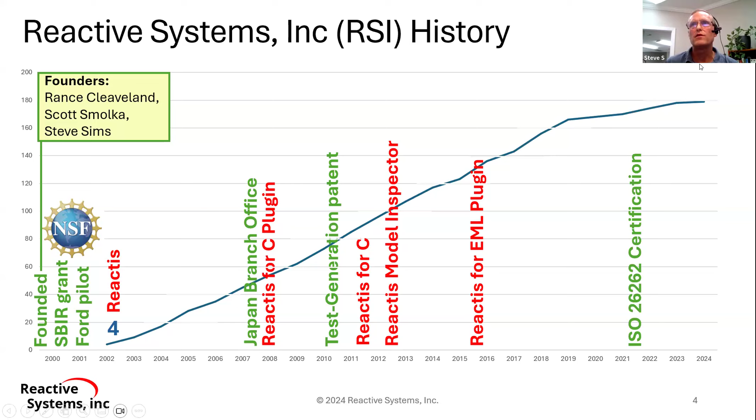We launched 3 more products over the next several years. And then in 2021, we received ISO 26262 certification for our products. That is a standard that mandates the development process for safety critical automotive software.

So we've incorporated the company. We had a lot of ideas about how formal verification could help in the development of embedded software. The first thing we wanted to do was try to find a partner that we could do a project with. So we started attending some more industry-leaning conferences. We met some engineers from Ford and discussed our ideas about the company with them, and they agreed to do a pilot project with us where we would together analyze a piece of their software using formal verification.

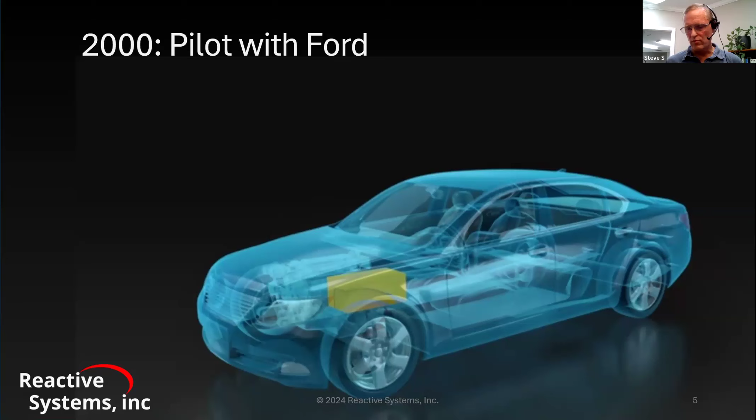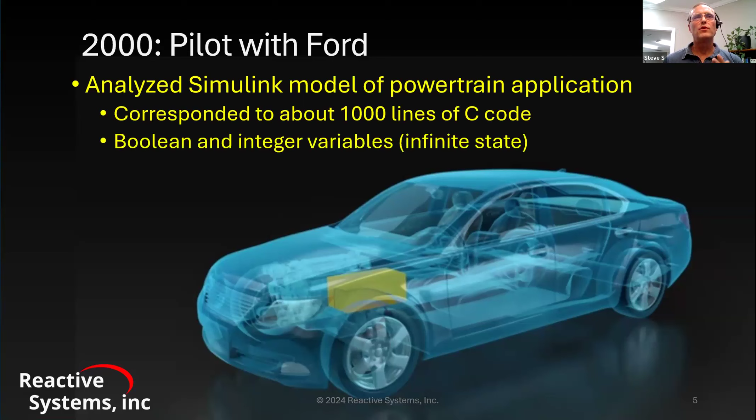About that time, Ford and other automotive companies had started using a modeling language called Simulink, offered by the MathWorks, as a way of modeling their software. So Ford gave us one of their models of a powertrain application to look at. It wasn't a huge model, but it wasn't a toy model either, corresponding to about 1,000 lines of C code. It had both Boolean and integer variables, so it was infinite state.

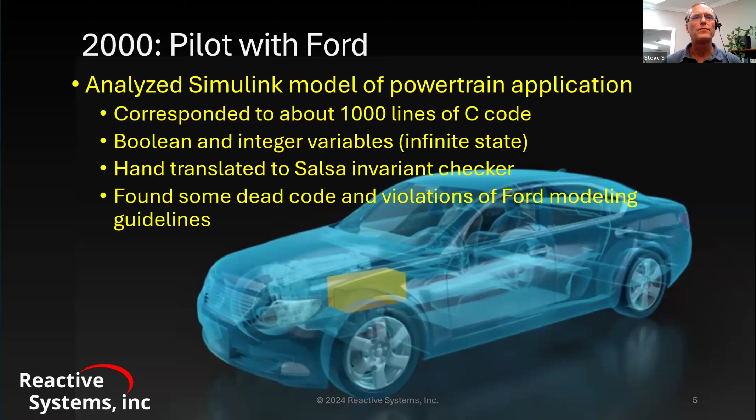What we did was hand translate that Simulink model into the input of an invariant checker to check some properties. We were able to uncover some dead code in that model and also some violations of Ford's modeling guidelines. That caught Ford's attention and gave us hope that we were on the right track. It also had a couple of big impacts on the direction we would take: first, it pushed us towards Simulink as the modeling notation we would support, and second, it opened us up to the automotive industry as a potential market for our products.

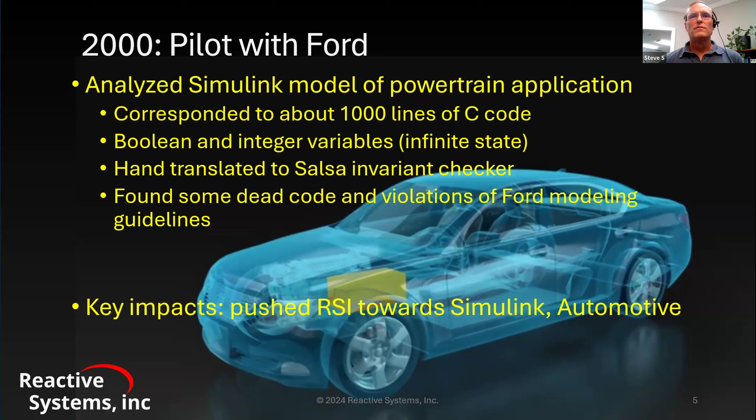At this time, there was already a fair bit of software in cars, but over the past 25 years, that's just exploded. So today, cars have massive amounts of software, and all that software needs to be tested.

It's just computing the disjunction of its inputs. In addition to logical operators, you have relational operators, mathematical operators, and more complicated functionalities such as an integrator block. You can decompose your model into smaller parts by creating subsystems. Each subsystem will have some inputs that it reads and some outputs that it updates.

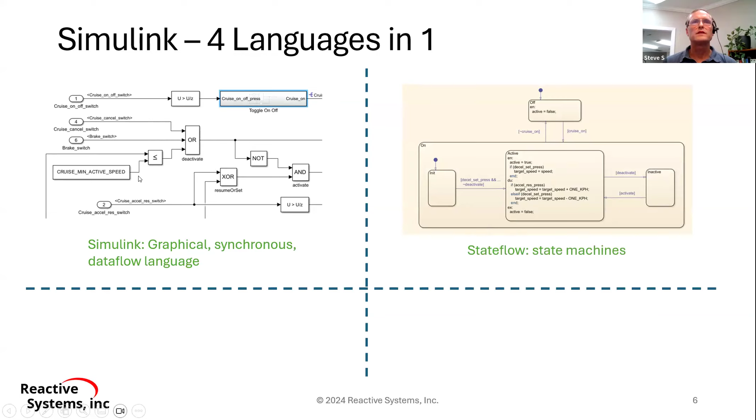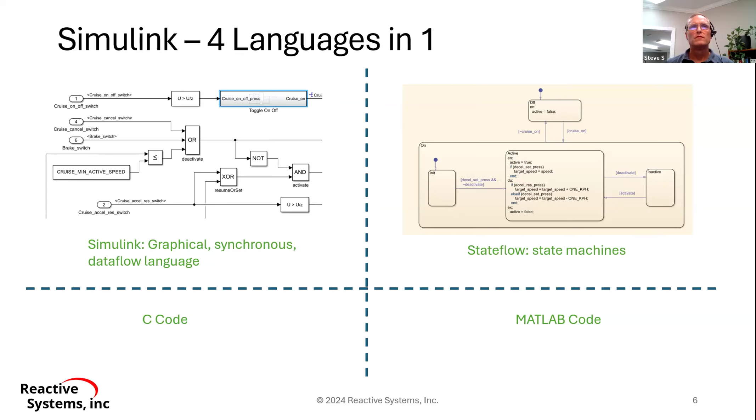Stateflow is a state machine notation. And you can basically create a state machine that you insert into a Simulink diagram, and that specifies the behavior for that subsystem of the model. You can insert a chunk of C code anywhere in your model. You can also insert a chunk of MATLAB code, which is the MathWorks matrix manipulation language. So it's a very complicated language, but it was one that was starting to be adopted at the time we

launched the company. So our first big decision point was, after this project with Ford, we saw that Ford and many other companies at the time were starting to use Simulink. So should we target our tools for Simulink, or should we go with the homegrown language? As I mentioned, Rance, Scott, and me, to some extent, have done a lot of research in what good specification languages were. So we had a lot of ideas about what a good modeling language would look like. So we had to decide, do we define our own for our tools to use, or do we go with Simulink, which is the language offered by the MathWorks?

So some factors that went into that decision. It's a much easier sell if the company you're working with is already using the language. So Ford, for example, already had Simulink models. So the selling point to them was, okay, you have a Simulink model, we can perform some checks on that model. It's a much easier hurdle to surpass than, okay, first translate your software or your Simulink model into the notation of our tool, and then you can perform all these neat checks that we're able to do. So if we can perform checks on a model that the customers already had, that was a big point in the favor of Simulink.

Secondly, we were young at that point, just a less than a year old startup. So companies were hesitant to commit to using a modeling language that we came up with. They didn't know how long we'd be around. Many startups fail after just a few years. It's a big investment to develop models in the notation, so they were hesitant to make that investment on a company that was so young. So that was another point in favor of Simulink. And then at this time, Simulink was already starting to take off, even dominate in the automotive and aerospace industries. So it had a lot of momentum behind it already.

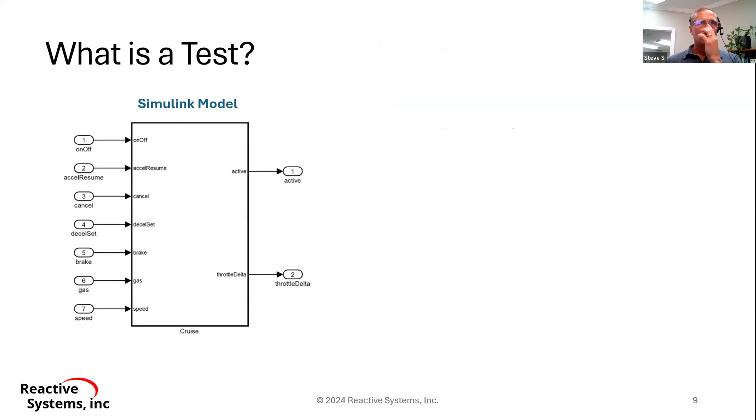The second initial functionality we offered was automatic test suite generation. So the idea here is that you have a Simulink model. Our tool will take that model, analyze it, and then automatically produce a test suite that comprehensively exercises the behavior of your model. So we want to generate test suites. So what is a test for Reactis? It's just going to be a simulation run of a model. So here we just have a small Simulink model that has some inputs that it reads and some outputs that it computes.

So a test is just going to be an execution run of the model where we feed in some inputs, capture those inputs in our test. The model computes the outputs. We capture those outputs in our test. Let me take another step, feed in some more inputs, compute the outputs, capture those. Feed in some more inputs, capture the outputs. So it's just a simulation run of the model where we're capturing the inputs and outputs.

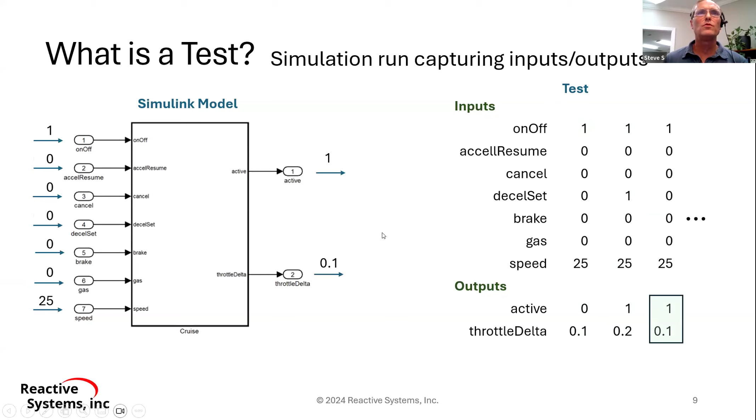So Reactis Tester, to recap, it's going to take a Simulink model as input, automatically generate a test suite. That test suite is going to consist of a set of tests. Each test is a simulation run of the model. That is a sequence of steps where at each step, we capture the inputs that we fed into the model and the outputs that the model computed.

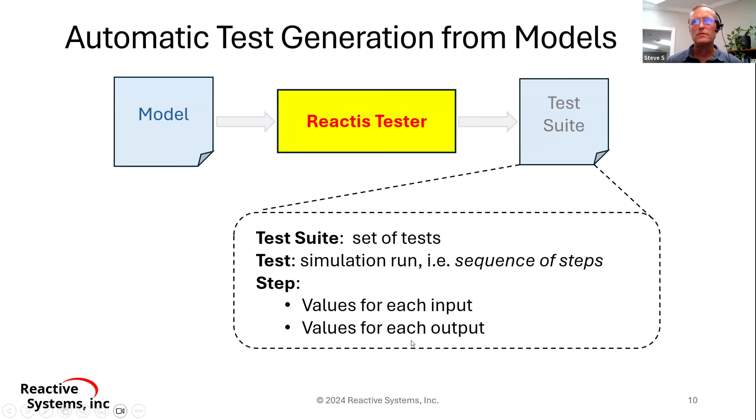Okay, so what are our goals for these tests, and what can they be used for? The most important goal is that we want to maximize coverage. We want these tests to exercise as much of the model's behavior as we can. We want them to be thorough, so we maximize the chances that we uncover errors when they execute. But at the same time, we don't want these tests to take forever to run. So we want to avoid redundant test steps whenever we can, so that these tests can execute quickly.

So while we want the test to be comprehensive, we also want to have as few overall test steps in the test suite as we can. Then finally, as I said, we want to store both the inputs and outputs to make it more convenient to do different types of things with these tests. For example, just by generating these tests, we can uncover runtime errors that I mentioned previously, divide by zeros, bad array indexes, overflows. So just by doing the very comprehensive simulation that we're doing to generate these tests, we have a good chance of finding runtime errors in a model.

These can also be used for regression testing. So let's say you make some changes to your model, and you want to check and see if those changes impact the externally visible behavior of your model at all. What you can do is generate a test suite from the original version of the model, run those tests on the new version of the model, then any differences in the outputs calculated by the new version of the model that are different from the original version of the model will be flagged.

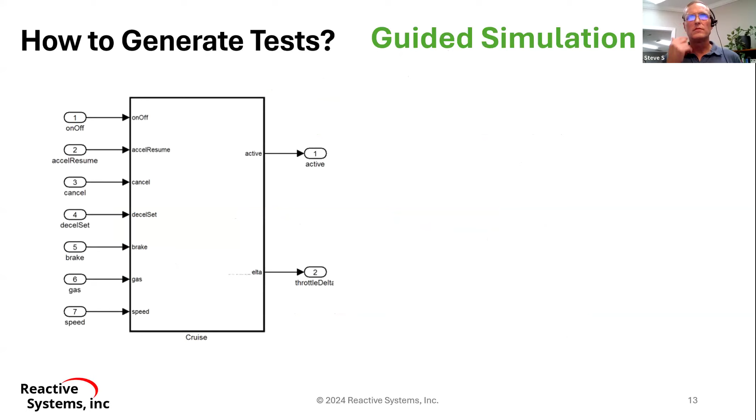So how do we generate these tests? We use a technique that we call guided simulation. Scott mentioned this in his introduction as well. What is guided simulation? So to generate tests for this model, we're first going to identify all the different coverage targets in the model. So we're going to look in our model, see what the logical operator blocks are. For every logical operator block, there's going to be some decision targets, condition targets, and MC/DC targets. So we identify the coverage targets. We then simulate the model.

As we simulate the model, we capture the inputs and outputs, as I had showed earlier. We track the coverage. We look at which coverage target has been exercised and which has not. And then finally, the guided part of guided simulation is that for every simulation step we take, we want to look at which coverage targets have been exercised and which have not. We want to pick a target that hasn't yet been exercised and try to pick inputs that are going to cause that target to be exercised.

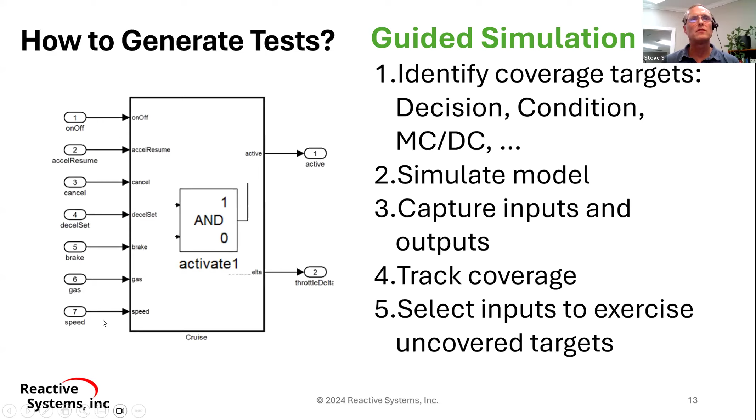So how do we pick inputs? That's the hardest part of guided simulation. So we have two main approaches that we use for picking the inputs. The first is using SMT solvers. So we identify an uncovered coverage target. We then formulate an SMT constraint such that if we can solve that constraint, the result will give us the inputs that are going to cause that target to be exercised.

We started out with some homegrown solvers, and then in 2016 switched over to using the Z3 solvers offered by Microsoft. If we're able to do this, this is great. We're gold. We can generate a good test suite that covers our model if we're able to do this.

But remember how complicated Simulink is. It has the data flow language. It has the state machine language. It has C code in there. It has MATLAB code in there. It's a very complicated modeling language. So we're not always able to formulate these SMT constraints in order to get our inputs.

So in the cases where we're not, we have to fall back on option 2, which is to generate random input values. In selecting these random input values, we do take user constraints into account. So for example, a user can specify that a particular input should be within a given range. Then we also have a collection of heuristics that we employ to improve the likelihood that we cover more targets with our random searches.

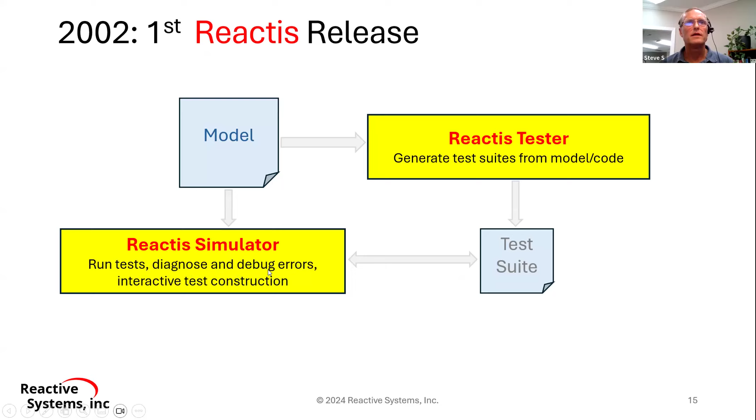So our first Reactis release was in 2002. It included Tester, as we've been talking about, and Reactis Simulator, which is a model execution environment. If Tester finds an error, it's very helpful to be able to execute that error to understand exactly what's going on as that error occurs and diagnose and debug the problem. So Simulator is really a full debug environment for Simulink models.

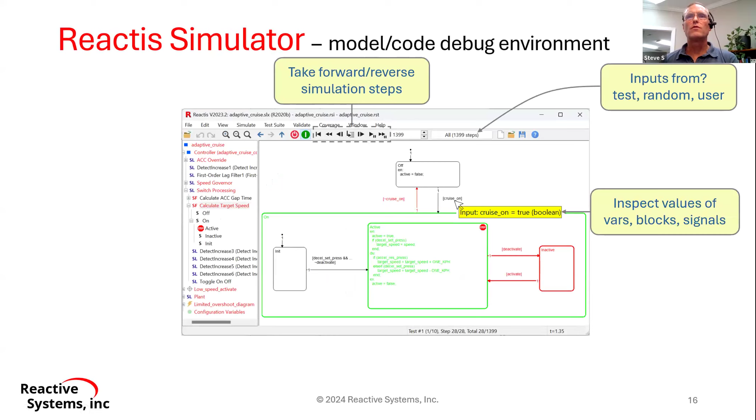You can execute tests that have been generated by Reactis Tester. You can control your stepping with these controls. And one thing that's nice is that you can go backwards in a simulation run. That can help in diagnosing what's going on before the actual error occurred. You can hover over any variable to see its current value. Unexercised parts of your model are highlighted in red. You can set breakpoints. You can open a scope to see the values a variable has taken on since the start of a test. So it's really a full debug environment for Simulink models.

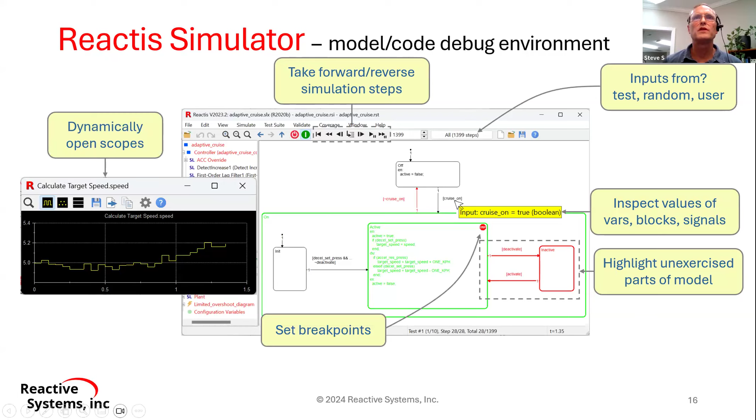In 2003, the next version of Reactis, we launched Reactis Validator. What this allows you to do is check if a model satisfies its requirements. It allows you to formulate requirements that your model should meet. Reactis will then do a search to see if it can find any violations of those requirements. If it finds a violation, it's going to give you back a test. This test you can execute to understand the exact sequence of events that leads up to the problem.

So the requirements are formulated by giving assertions and user-defined targets. An assertion is just an expression that should always be true. If it ever becomes false, that means the requirement has been violated. A user-defined target allows you to specify a scenario that you want to make sure you're testing in order to properly stress the requirements you're checking. Reactis supports two notations for giving assertions and user-defined targets. You can either give them as C-like expressions or as Simulink/Stateflow observer diagrams.

How do we check it, or how do we look for violations? We use the guided simulation technique that we described for generating tests. So, of course, this means that we can find bugs, but we can't necessarily prove their absence. So we might find cases where a requirement that you've specified is violated, but we can't say for sure in most cases that the requirement can never be violated.

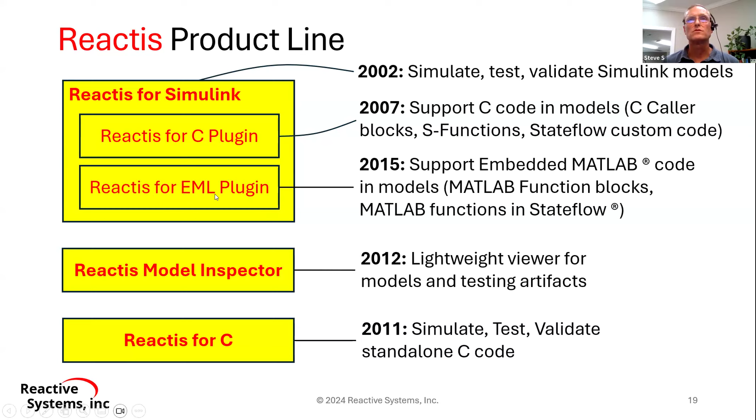And the Reactis for EML plugin does the same thing for embedded MATLAB code that the C plugin does for C code. So if somebody sticks embedded MATLAB code in their model, this allows Reactis to identify the coverage targets within that embedded MATLAB code and generate tests to exercise those targets. About out of time, so I think I'm just going to skip this slide.

So to recap, in 1999, Rance, Scott, and I saw an opportunity to possibly commercialize formal verification, bring it to the development of embedded software in a commercial setting. We had a little bit of a pivot from actual formal verification to more of a bug finding approach where we can't prove the correctness of the software we're working with, but we can find bugs in it.

We can find runtime errors. We can help with checking C code against the model. We can help with regression testing. We can help checking if a model meets its requirements. Reactis is currently used by many companies around the world, mostly in the automotive industry, some in aerospace. So we've been very happy with the success of the company. I think the company is one of Rance's legacies. It's something I know that Scott and I are proud of, and I know Rance is proud of.

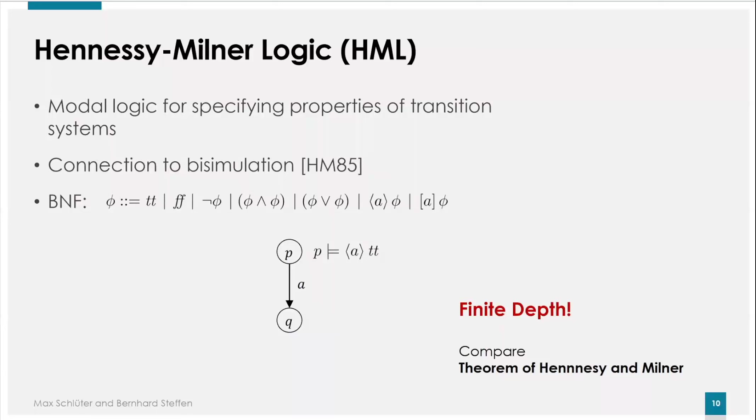This much stronger property cannot be true for Hennessy-Milner logic, because Hennessy-Milner logic can only look finitely deep into the computation tree, and we are talking here about regular systems with potentially infinite behaviors. Let me now come to the main result of this talk. We have just understood that Hennessy-Milner logic is not expressive enough to specify the characteristic formula of a process, just because it cannot specify depth.

But, and this is what I want to show today, it is sufficient to specify an invariant, a property which always holds, which is sufficient to characterize a process up to bisimulation. That this is possible relies on the following observation: it is possible to decompose the specification into two parts, a characterization of bisimulation equivalence classes and the transition relation.

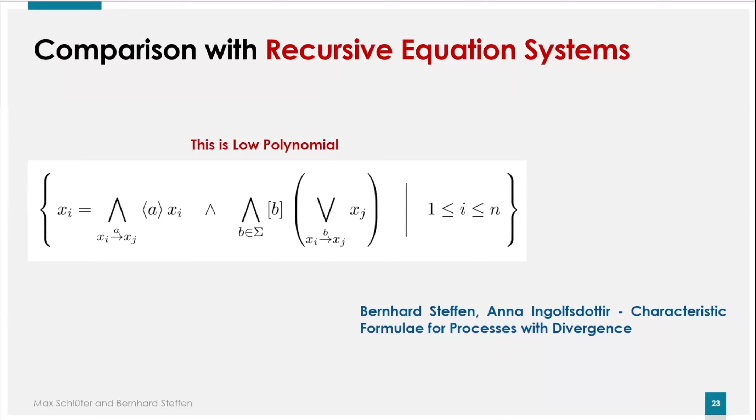This result very much shows the power of recursion and recursive definitions, and that algorithmically this recursive power is not even that problematic, because you can very easily solve these things. Model checking alternation-free mu-calculus is, as I mentioned before, linear in the size of the transition system as well as linear in the size of the formula. So the whole thing is very nicely computable.

So let me finally come back to the main topic of my talk, which was not complexity. Of course, complexity is always a major issue when it comes to algorithms or also to specifications. If the specification size explodes, what does it help? And of course, it is nice to see that the approach I developed 30 years ago is very competitive.

No, what I wanted to show here is the expressive power of Hennessy-Milner logic. Hennessy-Milner logic is sufficient to fully characterize bisimulation equivalence in terms of invariance. You just need the invariance property, you have to apply it everywhere, but then you just need Hennessy-Milner logic formulas. And this is something which I find very interesting.

And this shows the power of basic concepts. One part here is the decomposition in state properties and transition properties. If you have the global transition formula, which is easy, then you can just describe by means of Hennessy-Milner logic also the state distinguishing formulae. This together is already sufficient to arrive at this result.

And I like that a lot because it shows the power of something like predicate abstraction. We don't need to know always everything. It's sufficient to just know enough. And localization, it's sufficient to check or to describe the transition potential state by state. We don't have to do something global. These kind of two properties are very nicely illustrated here.

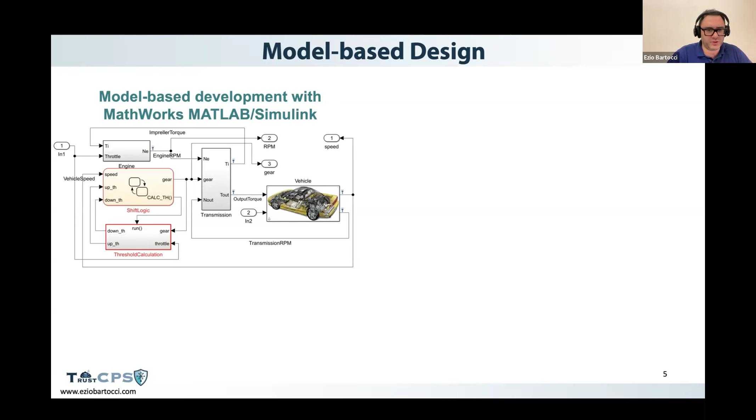The Simulink tool is designed around the data flow paradigm. Simulink provides a drag and drop graphical environment where the engineer can select blocks that represent operations or stages of the process they want to model. Each block has input and output, and data flows between these blocks along lines and connectors. This visual approach is aligned with the data flow modeling principle, where the focus is on the flow of data through the system.

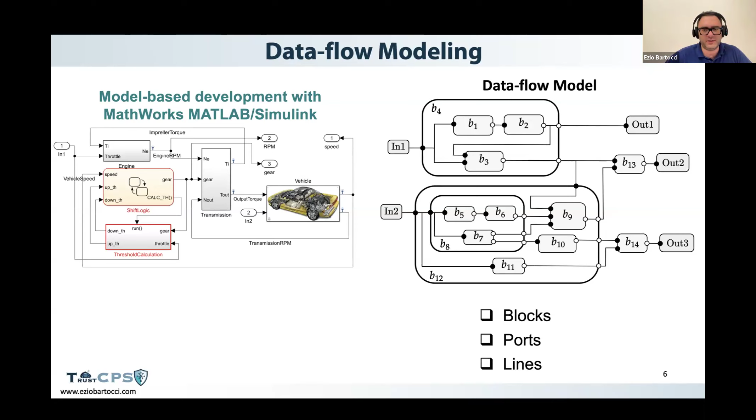Once we have the model in Simulink, it should undergo rigorous testing, and the simulation should be tested against some requirements. Usually the classical logic used in cyber physical systems to express requirements is signal temporal logic, a formalism used to describe properties of real value signals over continuous time. Signal temporal logic extends linear temporal logic with real-time constraints and predicates over real value signals.

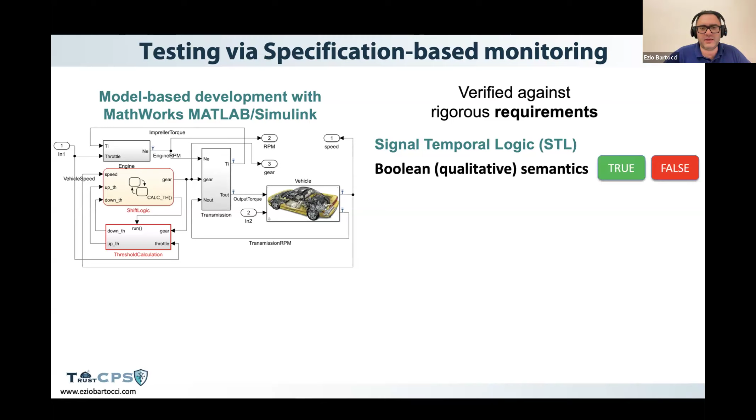The interesting thing about signal temporal logic is that it provides two semantics, two different interpretations. One is called the Boolean qualitative semantics, which basically provides a Boolean verdict, a yes or no, whether the simulation is satisfied or not by the specification.

But what is more interesting for testing and falsification analysis is the quantitative semantics. The quantitative semantics provides as the verdict a real value that specifies with its sign whether the system is satisfied or not - if it's positive, it's satisfied; if it's negative, it's violated. And with the magnitude, it specifies the distance: how much the simulation trace is satisfying, or how much it is violating the specification.

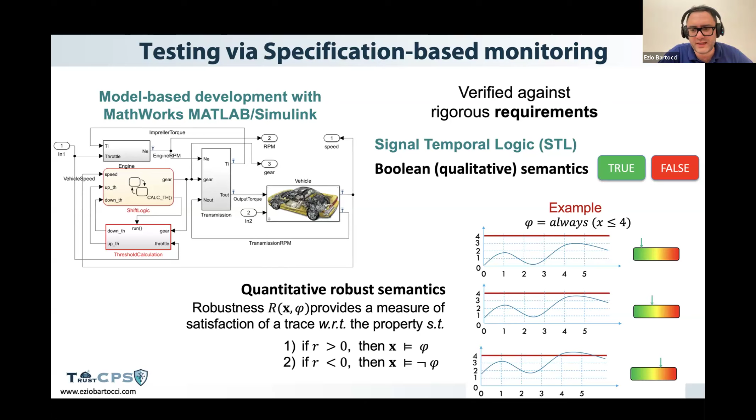This distance is used in testing and falsification analysis for search-based testing. The idea is to explore the input space or parameter space and use heuristics, for example particle swarm optimization or genetic algorithms, to search the space of inputs to find what input would, for example, violate the requirement. This real value semantics provides a fitness function for global optimization.

In order to be tested extensively, we need a test suite, so a set of tests. In this case, the specification is translated into a monitor, and the monitor plays the role of the oracle, telling us whether the test passed or failed. But one important issue when testing is also to understand, when a test fails, what is the cause of the failure. In particular, we are interested in localizing inside the Simulink model which blocks are responsible for this failure.

This is very challenging for two reasons. The model you saw before has only a few blocks, but in reality that does not represent the real size of the model. In fact, data flow modeling in Simulink is hierarchical - every block can be expanded into sub-blocks and so on. So the size of these models is very large, comprising several hundred signals to be observed.

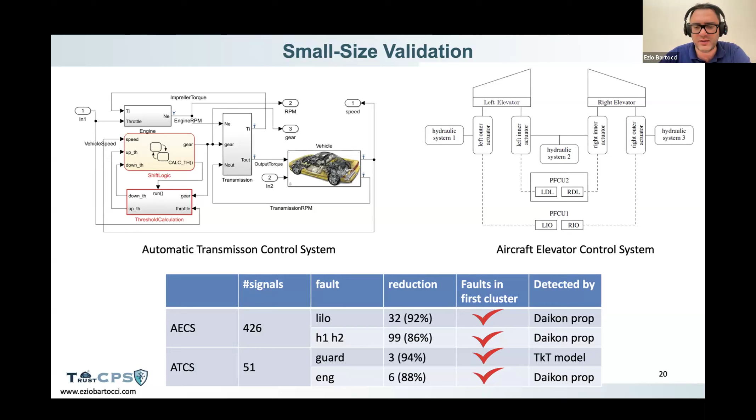Okay, but now I present another approach, because one of the problems that we saw is that CPS debug is very good in providing explanation, but it's not very efficient because it requires several steps. Plus, another problem is that sometimes we have a shortage of failing tests, and we don't have enough tests to accurately localize the faults. So our idea is to basically use failing tests and start from the failing test, try to synthesize passing tests that are very close to the failing test to improve the fault localization.

Let's see how the test synthesis works. So we start from an initial test suite, and we simulate the faulty model with respect to this initial test suite, and we obtain a set of simulation traces. Once we have these simulation traces, we monitor the simulation traces with respect to the specification, the requirement. And then we obtain two sets, the passing test and the failing test.

So we take only the failing test, and then we use a global optimizer that basically explores the space of the input of the test to find another test whose distance, an Euclidean distance, is as minimal as possible with the failing test, but is now making the oracle pass the test. Then with this, we basically generate a set of failing tests and passing tests.

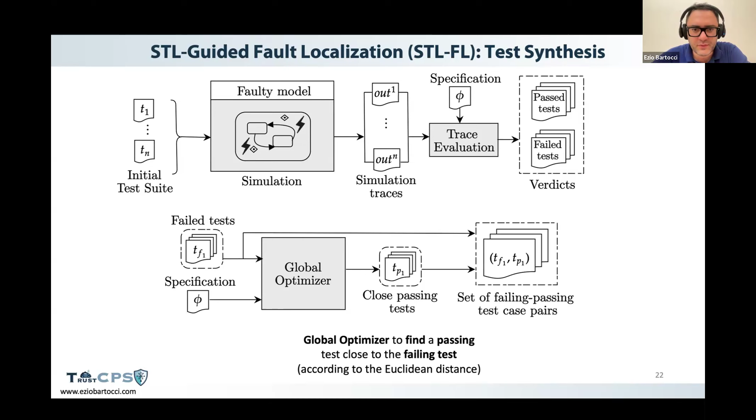Once we have this set of failing tests and passing tests, we simulate the faulty model and we record all the internal signals using both failing and passing. We obtain simulation output and we do trace analysis of this simulation output to identify what are the suspicious signals that are responsible to make the test that in one case is passing to be failing in the other case. Once we have done that, we map all the suspicious signals to the model block, and we provide to the engineer a list of suspicious signals and model blocks.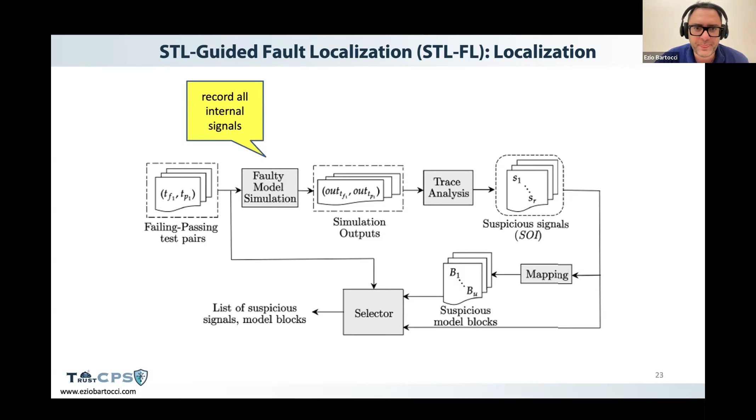So we performed more extensive validation for this approach. Basically, we use 3 different benchmarks. We have a special tool for automatic fault injection that generates many different faulty models, some with 1 fault, 2 faults, or 3 faults inside. We generate the initial test suite using adaptive random testing, and we use RTAMT for producing a monitor from the STL specification. We compare with our previous tool, CPSDebug.